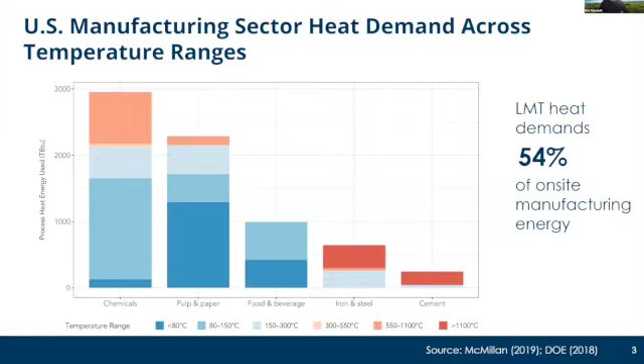The types of decarbonization opportunities we're talking about today relate to low and medium temperature process heat. So on this slide, you can see different temperature ranges for different major US industrial sectors. Around half of all the process heat used in US industry goes into what we would call low and medium temperature process heat. This is heat that is less than 300 degrees C. Now that's hot by human standards, but low by industrial standards when we're talking about heats of greater than 1000 C for heavy industries like iron and steel and cement.

And the findings that I'm going to discuss today, we were very excited about. So what we found was that there is a real opportunity in the US to start decarbonizing industry today by focusing on low and medium temperature process heat, primarily in the three major sectors that account for the majority of low and medium temperature process heat. That's food and beverage, pulp and paper, and chemicals. We think that we can reduce up to a quarter of their climate emissions by focusing on low and medium temperature process heat and deliver a lot of health benefits to U.S. communities, which I'll talk about.

We also consider energy efficiency. That's the first fuel in any plant upgrade. We find that, again, it's a win-win, and that a lot of these opportunities are cost-effective today, but we certainly need policy support to seize the full opportunity space.

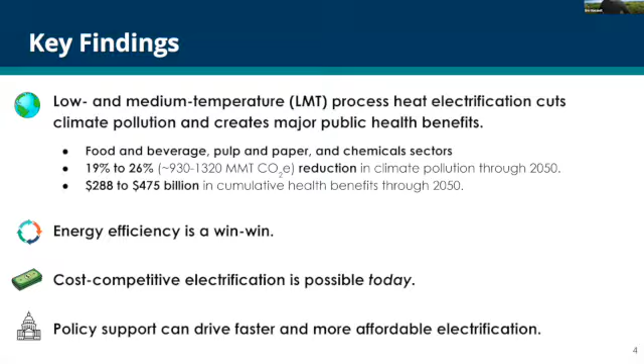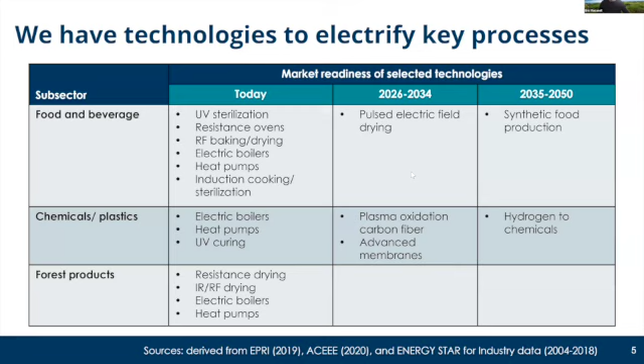So there are many technologies that we have already in hand off the shelf or which are being piloted, which are electrified technologies for replacing combustion in low and medium temperature heating applications. These are some of the technologies you see in the today column. There are also technologies coming down the pike, which will even open up more opportunities moving forward.

Our research question in this project that I'm going to talk about today is, where are the most technologically and economically feasible opportunities to electrify industrial process heat? And we're talking about in the near term. Where are there opportunities now? We focus this analysis on four main technologies. As you saw two slides ago, there are a lot of different technologies that are electrified that can be used to replace low and medium temperature process heat. But these four technologies are ones that we found have a really large potential today.

And I should mention also that low and medium temperature process heat, a lot of it relates to steam generation and processes that are running at temperatures achievable by steam. So we looked at two technologies in the top row for replacing the primary generation for steam. These would be industrial electrode boilers. You see a picture of that here. These are mostly drop-in solutions because a lot of the infrastructure stays the same. You just need to upgrade your boiler to an electrode version and have sufficient interconnect.

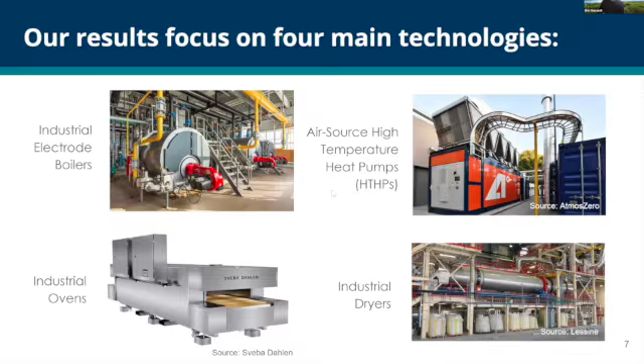And then there's more of an advanced solution here on the right, which is an air source high temperature heat pump. This is an emerging class of heat pumps that can be used in industrial facilities that can reach higher temperatures than traditional heat pumps. We also looked at electrified ovens and electrified dryers because these two technologies have a lot of applications in the food and beverage, pulp and paper, and chemicals industries.

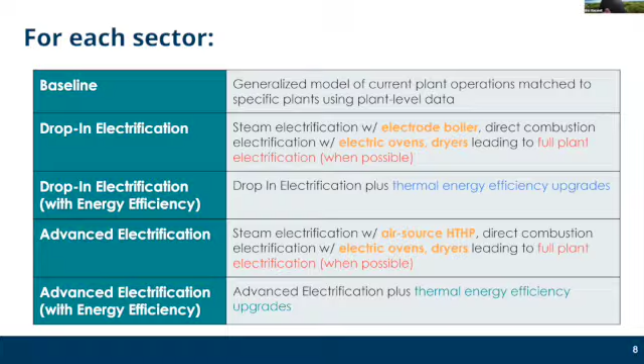And of course, there's no one size fits all for any industrial plant. So we looked at four different scenarios and we compared those scenarios to the baseline. We're calling our scenarios drop-in electrification. This would be an electrode boiler and replacing dryers or dehydrators or ovens wherever they exist. And we also have a variant on this scenario where we looked at maximizing energy efficiency. In the advanced electrification scenario, instead of using an electrode boiler, we're using a high temperature heat pump because that takes a bit more engineering at the plant level. We also looked at a variant where we're optimizing the efficiency of the plant while we do the upgrade.

And the way we approach this as engineers is we use detailed process archetypes. So these are engineering mass and energy balance models of typical plant configurations. We looked at 33 different types of plant configurations across our sectors of interest. And, if you're engineers and you probably did this in some of your training, having a digital twin, a simple digital twin of a plant gives us the opportunity to explore what-if scenarios.

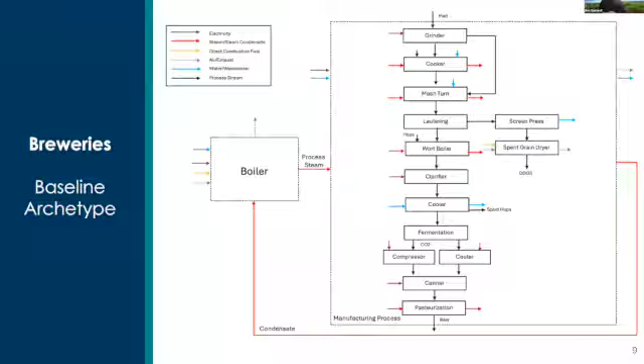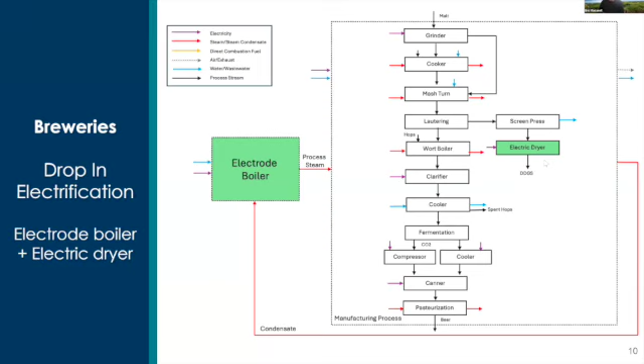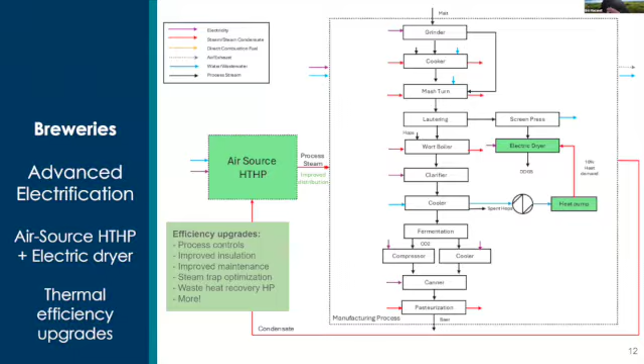And the other thing I want to stress is because we've modeled these operations from the bottom up based on real world technology parameters and plant characteristics, we can also look at a wide range of efficiency opportunities when we simulate our scenarios, including things like upgrading process controls and insulation and recovering waste heat. So these were very rigorous models that we used, and here are some of the results.

For our four industries, what we're seeing here is that alongside a clean grid, electrification can certainly reduce industrial pollution, but it also is going to take some time. So in this graph, we're seeing the baseline emissions from our scenarios in teal, and we're seeing our four different scenarios colored in shades of orange here, I guess, or yellow, from left to right. And what we can see is under traditional sort of drop-in solutions, an electrode boiler, there are many places in the country where it actually will increase emissions today because the grids are still dirty.

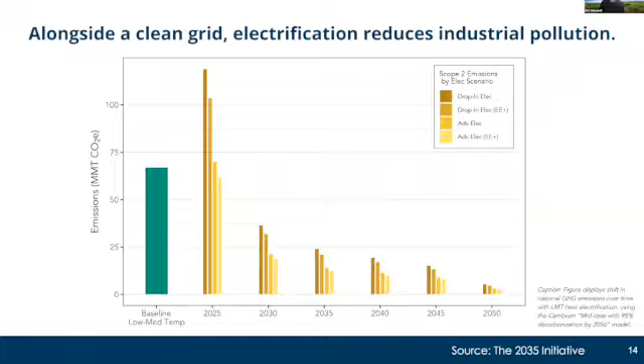But over time, as the grids become more reliant on renewables and the carbon intensity drops, all types of solutions work. Where advanced electrification, meaning the high temperature heat pump, has an advantage is that it's much more efficient. We're not creating heat through combustion. We're moving heat into the system by moving it from the outside, essentially, and valorizing it. So in many parts of the country, advanced electrification can reduce emissions compared to combustion today, even with less than optimal grids.

The economics, of course, are really important. So in the technical analysis, as engineers, we can always say, yes, this technology, if you install it, will save energy, it will reduce emissions, but we don't know how cost effective it is. This is critical for crafting policy because what we found is that electrification has two major challenges. The first is that upfront costs can be steep.

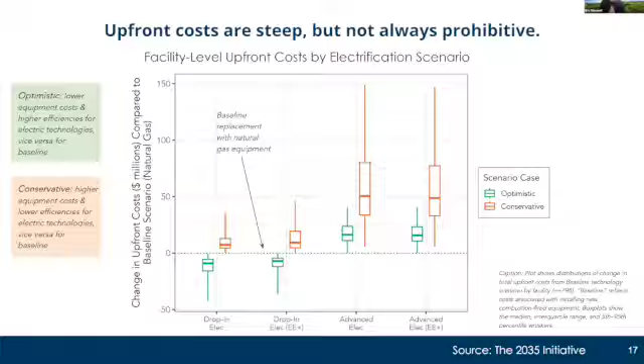So what are we seeing here? We've got our four scenarios: drop-in electrification, drop-in with efficiency, advanced, and advanced with efficiency. There are some scenarios where drop-in electrification under optimistic cost conditions, meaning lower capital costs, lower installation costs, could be cheaper actually than the baseline of replacing your systems with natural gas boilers. But for most of the variants we analyzed, costs did go up on an upfront cost basis. And that means really we have to rely on the OpEx, the change in energy costs, for making the investments attractive. It's a challenge in the US.

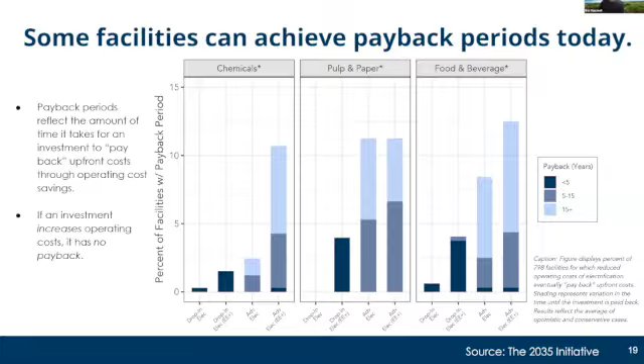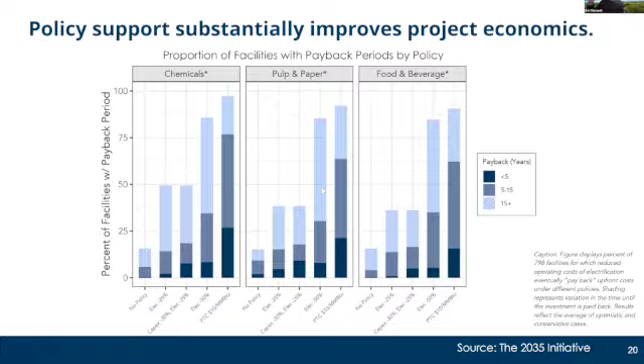And so our policy recommendations were we need to reduce risk and capital expenses for these investments. We clearly need to reduce OpEx, especially in places where we have high spark gaps. We need to leverage efficiency in these projects to make everything more cost effective. The beauty of efficiency is if you upgrade the efficiency of your plant before you install your electric boiler or heat pump, you can sometimes reduce the needed capacity for that replacement. We need to raise demand for clean products, eliminate fossil fuel subsidies, and create lots of technical assistance, especially when it comes to high temperature heat pumps, which are a fairly new technology.

I'm going to close with just summarizing that we also considered co-benefits. So climate change is certainly an important problem that we want to address. We need to begin decarbonizing industry today. But if we do so, it implies replacing combustion technologies with clean electric technologies. We can also see many large co-benefits for communities who are living around those industrial plants.

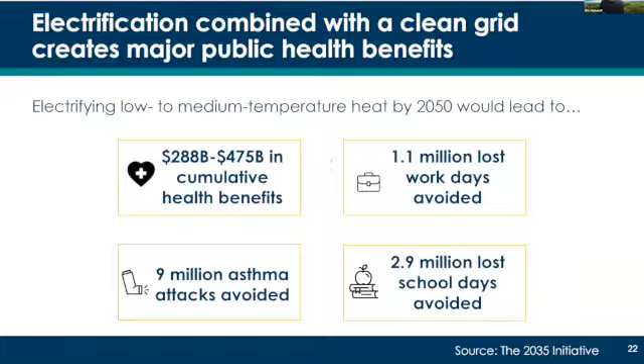So we estimated that hundreds of billions of dollars in cumulative health benefits would accrue if we were to electrify low and medium temperature process heat. This would translate into more than 1 million lost workdays avoided, millions of asthma attacks avoided, and millions of lost school days avoided. So there are serious human health benefits that would come along with these investments that policymakers need to be aware of because they also have goals for protecting public health.